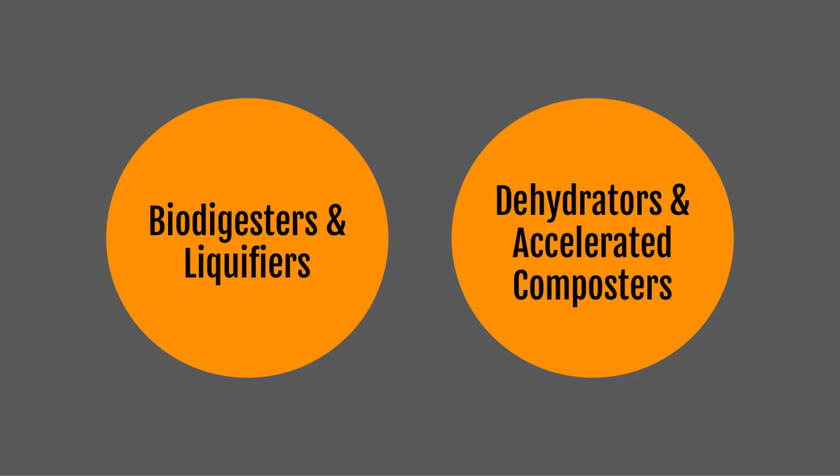Biodigesters and liquefiers often aerobically digest food waste using fresh water to dilute solids in combination with microorganisms or enzymes often, and dehydrators and accelerated composters use heat and a biological process to size reduce and pre-treat food waste to a certain degree. It's certainly a spectrum, and we'll go into the finer nuances of both categories here.

Biodigesters and liquefiers use fresh water, as I mentioned, and the aim here is to reduce biochemical oxygen demand and total suspended solids, or BOD and TSS, prior to discharge. Often these systems will have built-in grinders or shredders to help macerate the material, and they can often have little plastic chips in the systems as well to help grind the material down to a more manageable size.

These systems release effluent, and they often have to meet municipal sewer discharge requirements. We've seen that a lot of cities and municipalities have strict regulations around what this looks like, and many don't have formal policies at this point about what biodigesters and liquefiers must meet, or have separate permitting or registration requirements, and my colleague James will go into a bit more detail there as well.

The aim of biodigesters and liquefiers is to have this initial processing stage that will then go into the sewer system and be transferred to a wastewater treatment facility or a WWTF, and ideally be processed by anaerobic digestion further to generate energy, and then be land applied or composted.

It's important to understand that biodigesting or liquefying food waste doesn't necessarily remove landfills from the equation, but it certainly removes trucks from the road in terms of transporting food waste, and it also provides an opportunity for it to generate energy. Some wastewater treatment facilities incinerate or landfill their biosolids. It's only truly recycling if the biosolids that are generated then go on to future beneficial reuse.

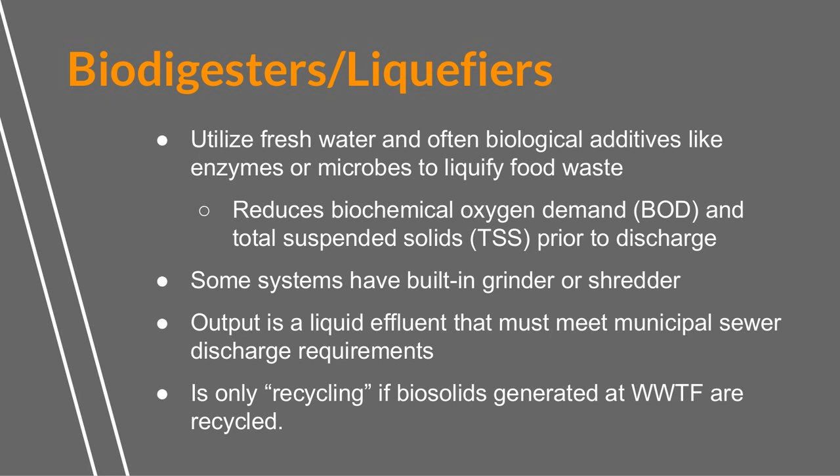It's very similar with dehydrators and accelerated composters as well. Dehydrators use heat or a thermal process to evaporate liquid in the food waste. The effluent is therefore steam that comes out of the systems and the machines.

Typically, there are built-in grinders or shredders as well, but not always. They do not use biological processes to reduce pathogens, and it's a bit varied. So you can see lots of different specs of what the output looks like, and often contrast them with a genuine kind of true mature compost. And depending on the system and how long it is processed, there's a big range. Some process them in 24 hours, some take 3 to 7 days.

It will look very different, but whenever you're using the end output of dehydrators, a dehydrated food waste product, it's important to understand that it is not necessarily the same material or same quality as an end compost that has gone through a full composting process. Therefore, it typically requires additional curing prior to use.

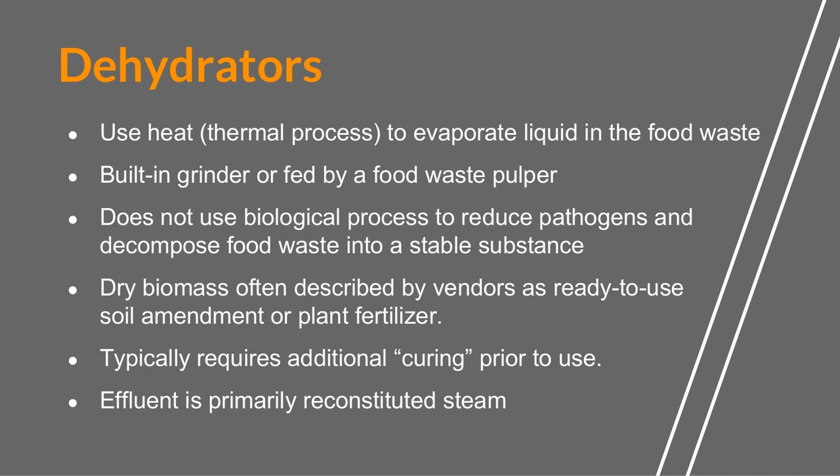It will often be marketed by vendors as a ready-to-use soil amendment or plant fertilizer. Sometimes dehydrators will also market their end product as a compost, but because it typically only uses heat and hasn't had an extended maturation process, it's important to know that it's not equivalent.

We also included in-vessel and accelerated composting systems in our research. Typically, a composting drum where food waste is mixed with an amendment such as sawdust or wood chips, often in different ratios, but typically maybe about 1-to-1. It can be paired with a pulper or shredder.

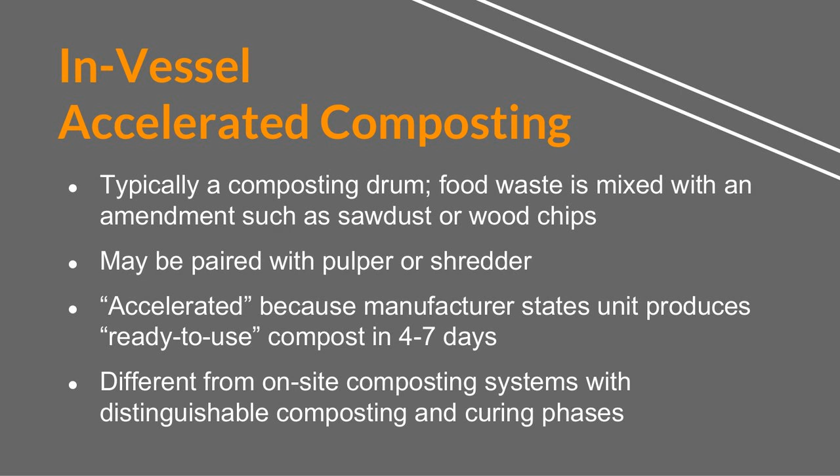And accelerated, we use in quotes here because manufacturers state that the units produce ready-to-use compost in 4 to 7 days, though often it requires additional curing phases on site. And we'll look at some really interesting examples of how different institutions have worked to integrate that into their processes and how they use the material at different stages.

Comparing dehydrators and biodigesters, or the dry and wet outputs, can be really helpful. Our work was really targeted to help generators of food waste to make more informed decisions about whether these systems are a good fit for them, and if so, what kind. And to a layman, it's often not clear what the differences may be, what the pros and cons of these systems are, what challenges they may need to be aware of, or where to go for more information.

These are a couple rules of thumb that we've found to be true. Most dehydrators can tolerate soiled paper, cardboard, napkins, some compostable packaging. Typically, you'll see that most systems accept anywhere from 5 to 15% of their inputs as kind of paper compostable packaging. It depends on the system. Biodigesters do not have that ability to process the same type of paper and packaging.

Biodigesters require significantly higher amounts of water than dehydrators, and conversely, dehydrators use significantly more electricity than biodigesters. And of course, this makes sense when you think through how they work. Biodigesters are flushing food waste into the sewer system and liquefying it, turning it into an effluent, whereas dehydrators are using heat, which requires a lot of electricity to size reduce the material.

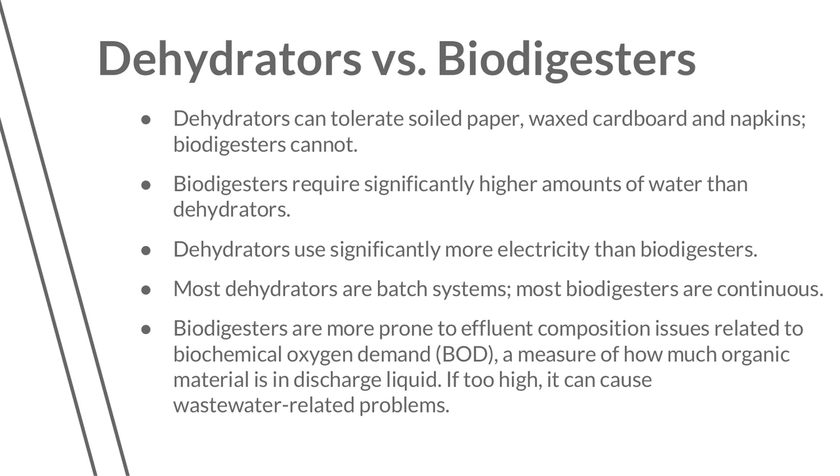One institution that used a biodigester had a huge portion of their waste that was citrus. And it turns out that the enzymes that they were using in their system didn't react well with the extraordinary quantity of acid and citrus that they had in their machine. So that wasn't a technology that they stuck with. So it's certainly important to think about the type of food waste that you're generating in your institution.

Critically, both dehydrators and biodigesters present waste collection savings compared to traditional source-separated organics. A lot of the qualitative information we learned during our research and case studies indicated that the ease and the cleanliness of dehydrators and biodigesters was important to them, in addition to the size reducing.

So thinking through what a given grocery might pick up: if you generate 20 64-gallon bins of organics a day, if you can reduce that 90%, that takes up a lot less storage space and certainly a lot less transportation. You can afford fewer pickups. And with biodigesters, when you're directing the material in a liquid form, certainly that's a very parallel benefit as well.

Why is now the time to investigate on-site pretreatment systems? With the Composting Collaborative's in-person meetings, we definitely try and assess what important gaps are in the industry and what topics are confusing to both the organics recycling community as well as food waste generators at large. And this appeared to be an area where composters were curious about how these systems may impact their organics recycling processes.

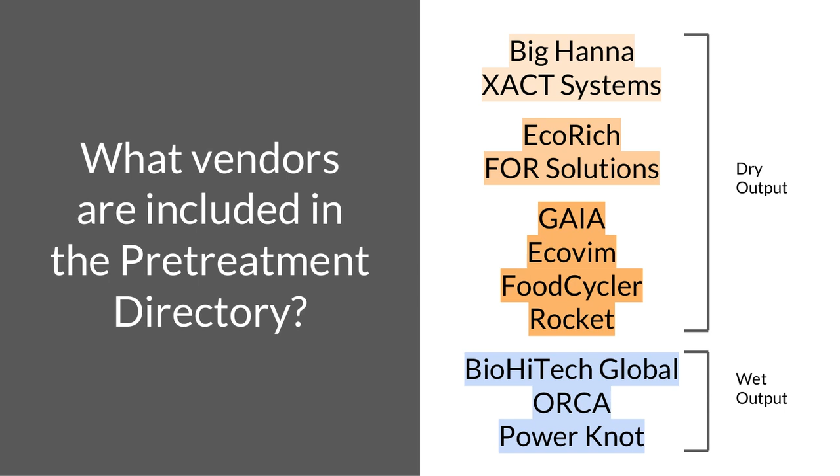So when you visit the directory, you'll see a flat list that's organized by company name and the units that they sell, and there are three ways that you can parse the information to find units that you're interested in investigating. The first one is just whether you're interested in a wet or dry system, if you have knowledge or a preference for that.

The second is if you have an idea of how much food waste your institution or your business is generating, you can sort units by that volume of food waste. And then finally, a lot of people have an idea of what budget they have available to spend on a system, so you can sort through the information that way if that makes more sense.

So inside of the directory, we have what we call vendor profiles. I'll just show you an example of one wet and one dry so you get an idea of the kinds of information it contains and how it's organized. Each profile will have the name of the original equipment manufacturer at the top, and sometimes the equipment manufacturer is the distribution and sales channel for that technology, as is the case with Orca. So you won't see any distributor information, but we try to provide a photo that lets you see what the unit looks like. We'll have a process description for how it works.

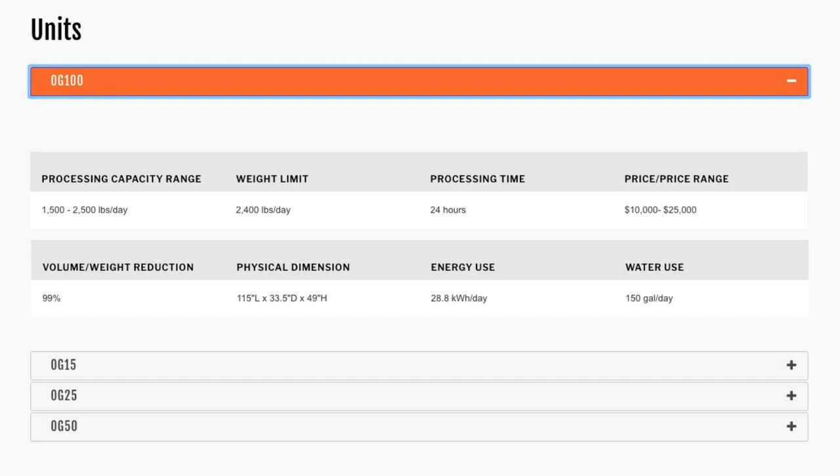Charlotte, can you hear me okay? I can indeed. Thank you. Okay. I just need to press my headset, I think, to my mouth a little closer.

The next example is from a dehydrator, and you'll see that the original equipment manufacturer is a South Korean manufacturer, and a lot of units, in fact, are made in South Korea. They got an early start on making these pretreatment systems. So in those cases, we will note North American distributors, primary and secondary, and give contact information so people can get in touch with them to ask more detailed questions about their technology.

Same format here too. You'll see some of the companies offer many different types of units, so sometimes there can be a lot of information to parse through. Same information here as displayed before, and I'd say most people will zero in on the price range that they think they have a budget for and how much space they have to accommodate or operate a unit.

We'll be sharing some case studies at the end of this, so I won't elaborate on this one, but all of these, if you click on them, will take you to a PDF where you can learn more about a particular end user's use of that technology.

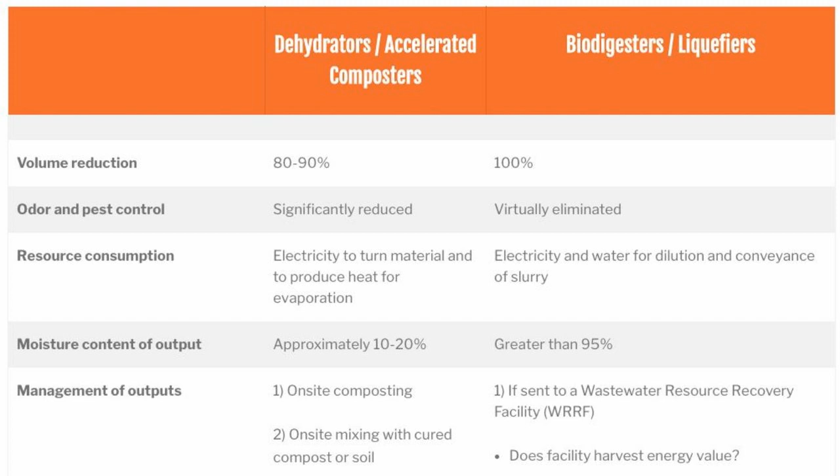So in addition to the attributes that you see here for volume reduction and odor and pest control, resource consumption, and management of outputs, we've included space requirements, so relative size of units, food waste containers, and the storage area that you need to accommodate handling the materials, the degree of control or assurance for the outputs that can go to building soil or soil fertility, operating cost, convenience, and those kinds of things.

We also tried to address the types of questions that prospective purchasers of these systems might want to know. The best technology is really the one that's right for your circumstances or needs. There's not a one-size-fits-all. So your selection of a system will depend on, one, the amount of organics you're generating and the amount of space that you have to accommodate. That'll determine the size of the unit.

Obviously, purchase price of the unit. There are also different costs for operating those units that people will need to factor in. On top of that, people have different intended uses for the outputs. So some are interested in just reducing the cost of the materials that they need to landfill.

In fact, we found in some states that had organics bans, people were purchasing these systems in order to reduce the volume of material in order to come under those bans, while others are interested in using them to divert materials from the landfill, so they will have them hauled off-site to a composting facility. And then others are interested in actually producing compost for on-site uses.

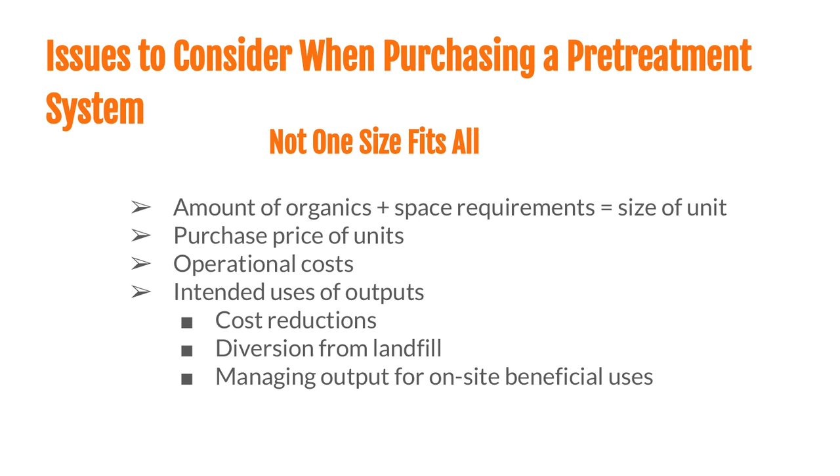So really, those are the questions that people need to ask themselves when they're evaluating which type of system and which particular product is best suited for your needs.

There were also several issues that our members raised and that we attempted to answer, but still remain as open questions because we don't really have enough in situ or operational data yet to answer them with a high degree of confidence. So one question is whether dehydrators and accelerated composters actually produce an output that can be classified as compost. So when is compost compost?

And there are many vendors that we see making marketing claims that their systems produce compost in anywhere from as little as 24 hours up to 7 days. So in the guidance document, we tried to square those claims with what we know about the science of compost and the length of time it typically takes to create a stable and mature compost product.

And in fact, when we asked questions of the vendors about this issue, many of them willingly offered that they tell their customers they recommend them to post-treat their output for another 3 or 4 weeks or more to produce a more stable compost, or they also recommend that they can mix it in a ratio of between 7 and 10 parts of soil or mature compost if they want to use it immediately. So that was helpful guidance coming from those vendors.

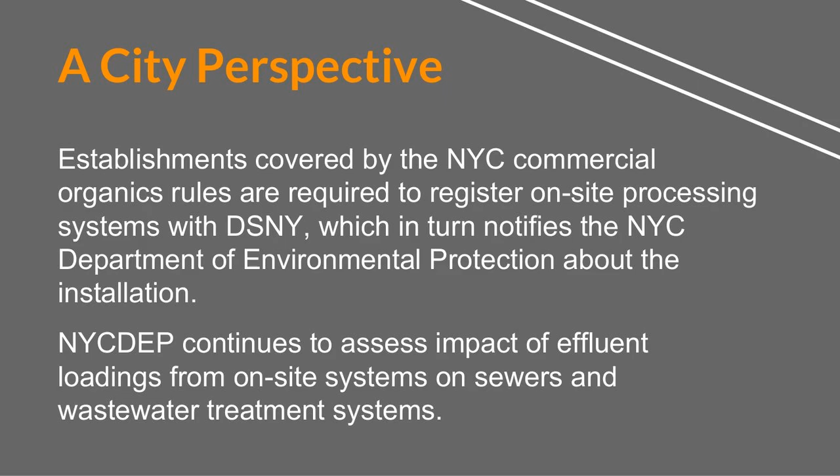We also heard concerns from various environmental NGOs that are in the collaborative, and they were asking questions about what happens to these nutrients after they've been treated in water resource recovery facilities or through anaerobic digestion. And they want to have a better understanding of basically what percent of biosolids or digestate

coming from either standalone anaerobic digestion facilities or wastewater treatment facilities that co-digest the food waste, how much of those are actually being composted or land applied as opposed to going to landfill? So we also tried to address that issue and provide information to folks that are asking those kinds of questions in the document.

So despite some of the concerns about false marketing claims or greenwashing, or even the fate of the output from these systems, from our research, we walked away believing that these systems offer some real benefits and have the potential to make a positive contribution to our goal of diverting organics from landfills. So just to quickly review those that are on the slide, one, they definitely can significantly reduce or eliminate the volume of materials that people have to manage on site.

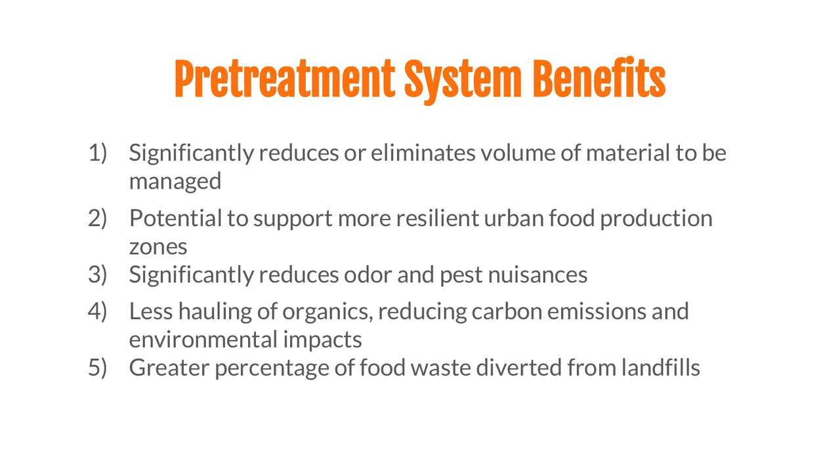It's also clear that these systems can result in less hauling of organics, and that has a benefit for reducing carbon emissions and other environmental impacts, such as SOx and NOx from these vehicles. And then lastly, they have the potential to divert a greater percentage of food waste from landfills, and given that landfills are the third largest source of methane emissions, that's a pretty important goal. So we think that they can play a significant role in that.

Its food-related operations involve 24 prison farms that cover more than 16,000 acres, and they also manage 50 greenhouses within those facilities. And I was surprised to find out that they produce 50% of the food that is consumed by the prison population, so both offenders and folks that work in the system.

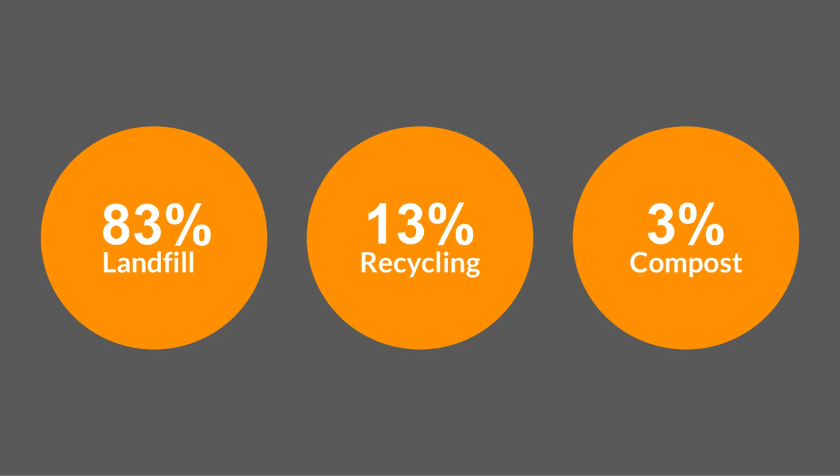There are some things that make that difficult for this particular institution. One, that high cost is because organics are heavy and therefore expensive to haul. They had concerns about holding the organics and composting them on site for rodents and pathogens, and also in rural areas where bears and larger wildlife would be attracted to the piles. They also wanted to reduce the amount of truck traffic in and out of the facility, because that is the most common method of people trying to escape, and it takes a very long time to scan each vehicle and make sure that it's secure before it leaves.

So given that, Lois Fagan, the Virginia Department of Corrections Recycling and Sustainability Manager, was already managing about 10 composting operations, and her goal was to give the remaining facilities, I think about 42 of them, access to composting within the next 5 to 8 years. Some facilities were more challenging, like high security units, because offenders manage these operations and couldn't work outside the prison grounds. So this led Lois to explore how pretreatment technologies, in this case food dehydrators, could help bring more facilities into VDOC's composting program.

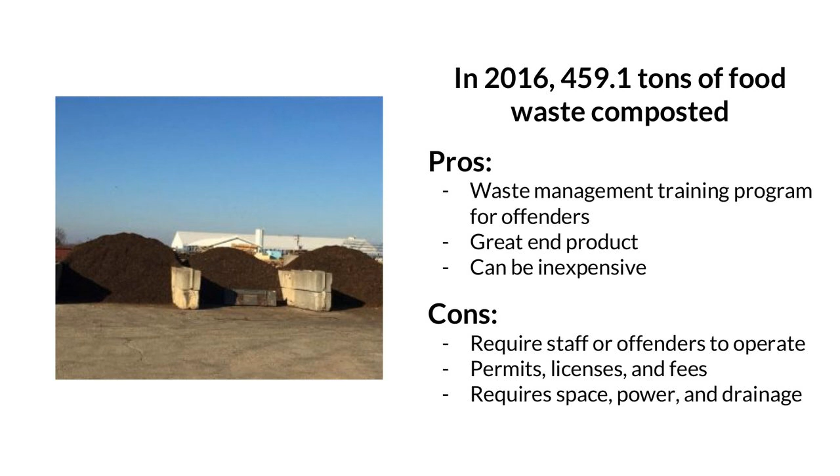So one of the things that they did that was interesting is they ran a couple of trials using dehydrators to better understand the value that they could offer to help increase the amount of food waste they were able to divert from landfills into compost. And you can see from this slide the waste volume and cost reductions were significant.

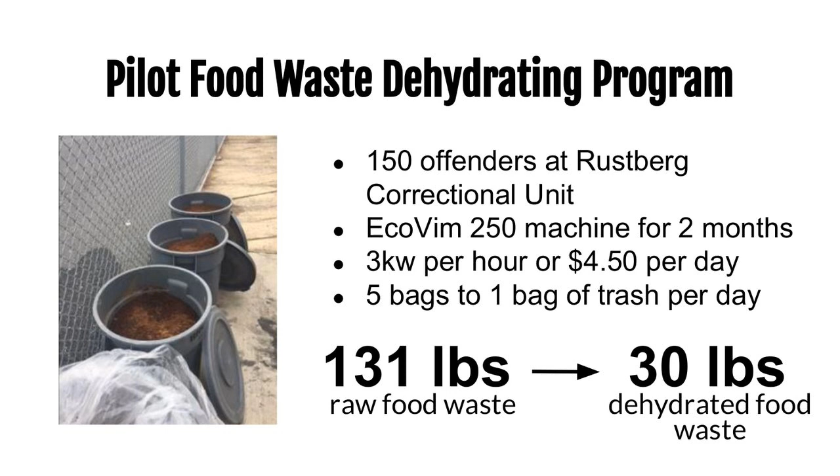And they went from 5 bags of trash to 1 bag per day, and had a typical conversion ratio of 131 pounds of raw food waste that could be brought down to 30 pounds of dehydrated output. And they also looked at how much energy it took and the cost of that energy to run these two EcoVim 250 units for this period of 2 months in the trial.

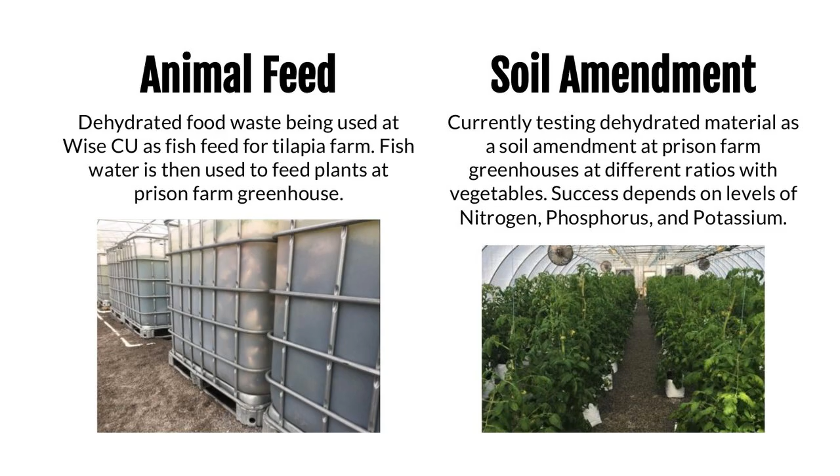The pretreatment trials also included pilots for the beneficial uses, and 2 examples of that: one, they used output as fish food for a small tilapia farm that was run by inmates, and that food was served in the cafeterias for that particular unit in Wise, Virginia. And the other one was to do some trials looking at the output as soil amendment in several of the greenhouse operations. So they took a rather scientific approach to looking at the value of these units.

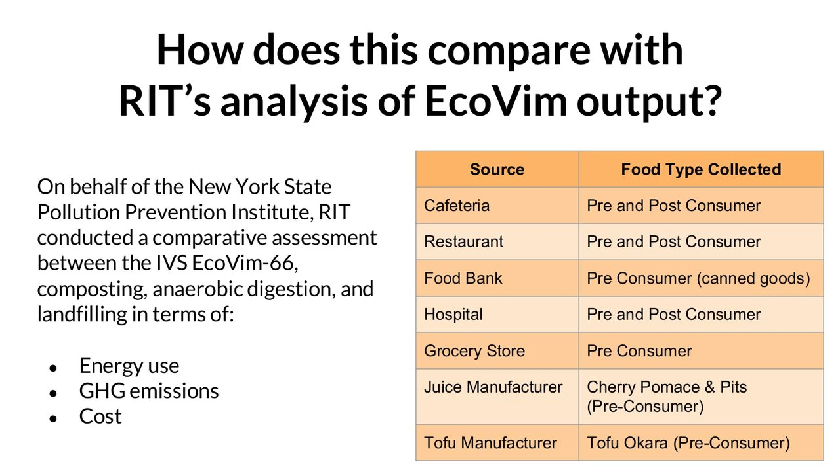I thought it was also interesting that they calculated the cost of managing 1 ton of food waste using these units. And in a best case scenario, if the dehydrated food waste were able to be sold for a profit, the cost of processing 1 ton of food waste through an EcoVim 66 could be as low as $11 a ton, which would make it less expensive than composting or AD or landfilling. And in that case, that was for fish feed or aquaculture feed, which has a price of $500 a ton. In a worst case scenario, meaning that if you're just landfilling the output, the cost can be as high as $133 a ton, obviously making it more expensive than those other options.

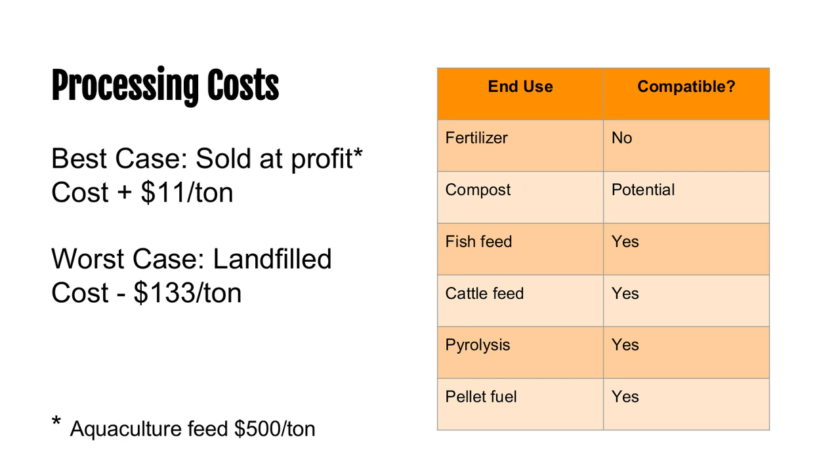So Charlotte, I want to have you go through, I think you're going to do a case study on Orca. Indeed, thanks James. One of the case studies that we're really excited to include in the directory is one about Mandarin Oriental Hotel in DC, which has 2 mid-size Orca units. And I believe Shannon Melizon with Orca, who was indispensable in arranging the site visit and providing lots of information, is with us today on the webinar. So thank you, Shannon.

Their 2 units, the G50 and G25, were installed about 2 years ago, and they've been overall really thrilled with how the systems have interacted in their processes. It was very important to them to have a turnkey service with installation and maintenance included, and Orca provides one of the most comprehensive on the market, including an every other month checkup and microorganism replenishment, since their system uses microorganisms to help process the food waste as inserted into the machine.

It was interesting to hear from the Mandarin Oriental Hotel staff in their decision-making process when they were investigating different pretreatment systems. And many of the staff members had worked at establishments prior that source-separated organics to have hauled off-site and composted. And while that certainly can be done in a really sanitary, easy way, they found that it wasn't always up to the par or level that they hoped. So having a system that managed food waste in a really efficient manner that was quick and pretty painless was a primary interest.

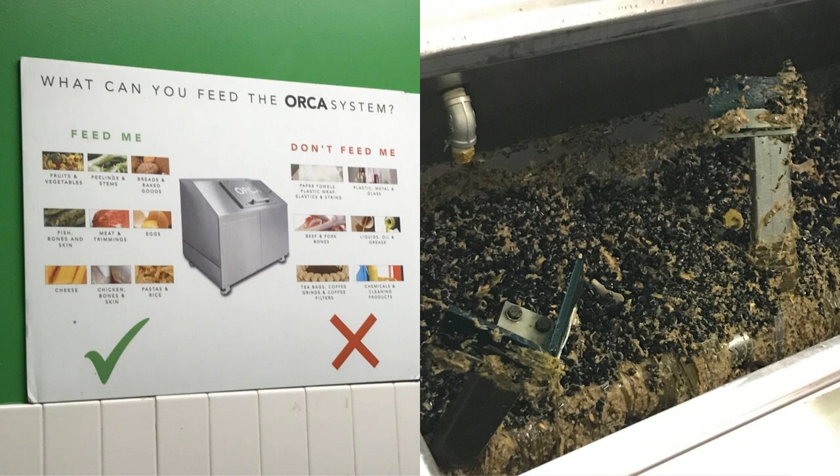James, I'd love to turn it back to you to look at another example of a dehydrator. Okay. Yeah, I guess we've got time.

So another interesting example of a company integrating, in this case, a dehydrator into its operations is the Sea Pines Resort. It's also a pretty large complex located in Hilton Head, South Carolina. So it's a combination of hotels and restaurants, golf courses, some meeting spaces. The 425 homes on site they do manage, but they don't manage their organic waste stream. So this case study was just talking about the business facilities.

They also did some pretty extensive waste audits in order to see what was flowing through their system to try to get an idea of the best methods for managing not only organics, but their recyclable waste streams as well. And what I thought was particularly interesting about this is that they had this hierarchy or a three-tiered system for how they managed their organic waste stream.

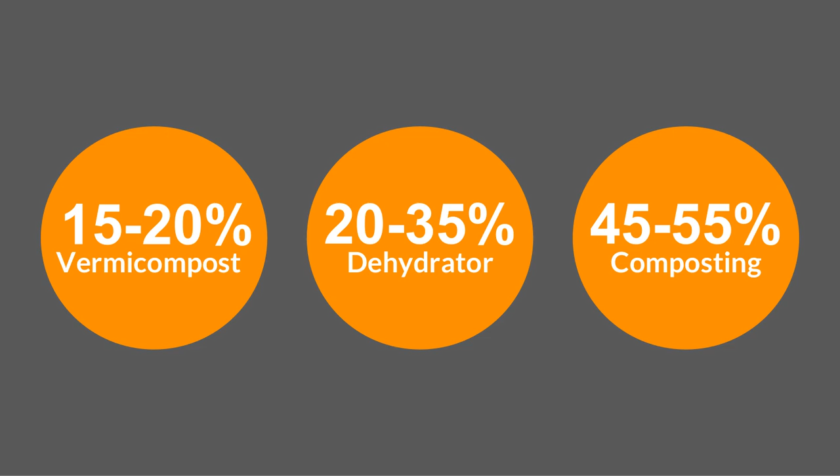And a portion of it they would steer towards a vermicomposting operation. They estimate about 15 to 20% of it goes there. 20 to 35% would be directed to a dehydrator. And then they would directly compost 45 to 55%, and then finish off that output from the dehydrator in their composting. They had an in-vessel composter.

So in terms of beneficial end uses, from the vermicomposting system that they had, they were purchasing worm tea as a fertilizer for their golf greens, and said that it was an excellent fertilizer, but it was expensive. So one of their incentives was to try to create this worm tea in order to enjoy some savings on using that fertilizer.

The units that they were using were Gaia dehydrators, and they had 3 different types. They said that they were using them primarily to process meat scraps and soup and citrus rinds, which I thought was interesting. I don't know if they discovered that those were better processed in the dehydrator as opposed to sending them directly to their in-vessel composter. And then, as I said before, they'll follow up with the output from these units into that in-vessel composter before using the output from the compost on their grounds.

So some around the resort and also on the golf courses and some of their banquet halls, I think. They had some advice; some was obvious, like metal utensils and large bones. They also, being close to the sea, serve a lot of seafood, and oyster shells were obviously not good for these units. And while they haven't had any breakages, those kinds of things will jam a unit, and somebody has to go in and fish it out, which is not a very pleasant task.

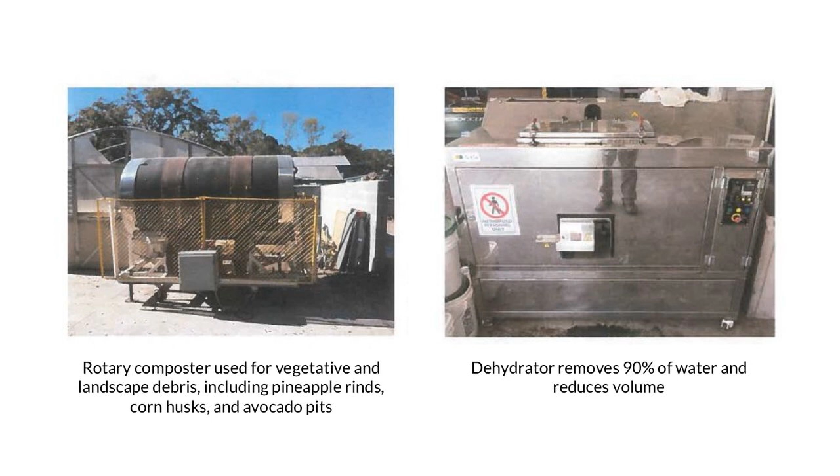It's also interesting that this is a very environmentally or sustainably minded company. So what they ended up doing with the oyster shells was bagging them and taking them to the Department of Natural Resources, which was conducting oyster bed restoration to help protect the shoreline, create fish habitat and purify the water. This is an area that's been flooded several times now from the hurricane. So that seemed like the best beneficial use for that particular waste stream.

I think that's all the information that we have. If we want to go to question and answer, Charlotte. Perfect. That sounds wonderful. And we have a couple questions related to some of the case studies that you just shared, James. So maybe we can start there.

One question is, does Sea Pines Resort process only pre-consumer food trimming? Do you recall? Yeah, well, there was one banquet hall where they had control over contamination that they would do front of house processing of organics, but all the rest of it is back of house operations. Yep, which is excellent. Generates a lot of food waste.